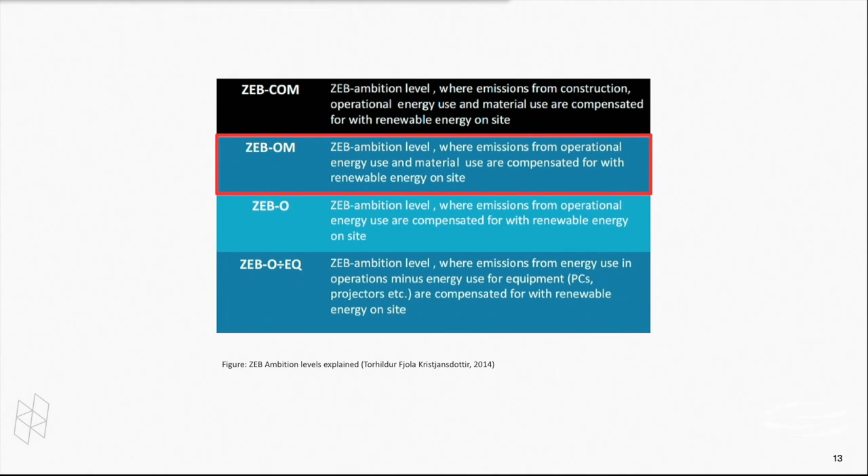This, as you read it, just as the text, doesn't seem too complicated, but as the methodology of working, it's actually a totally different world than all other projects we ever tried. The really glorious thing about this really high ambition is that it forces it into a life cycle perspective, meaning that we will need to count for both the production phase of every component and material coming into our construction site, including the transport, the construction site itself, then the full operational time of 60 years, which is the academic standard for how you count for things, called the service lifespan.

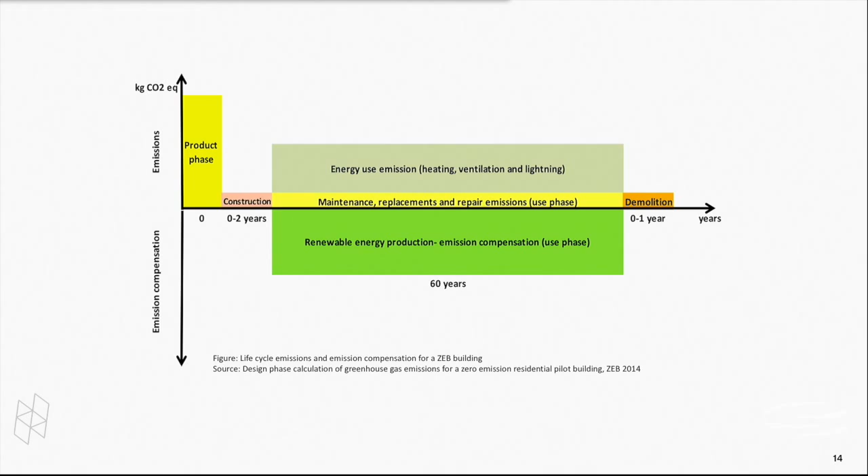So all the energy used for your operation, and also the changing of components, all of those are going to be counted for. Even the demolition, we never got that far yet, but this is still to be developed as a way of counting and working. And all of that should be paid back with renewable energy production on your roof.

So the first case, the first pilot, started with Entra as a developer, who had this complex of buildings a little south of Oslo. And they are actually quite general office buildings from the 80s. There's hundreds of these in Norway, probably around the world. We brought the energy use for those 2 blocks down from 220 kilowatt hours per square meter.

I'm sorry, I cannot really immediately explain that in feet and BTUs and all of that, so you need to come up to me later if you need a thorough explanation of the measurements. But we brought it down to 19.7 without changing too much of the architectural aesthetics.

Unfortunately, the municipality also wanted these to stay pretty much the same afterwards. They were very, very well renowned when they were there in the 80s, so they wanted them to, of course, look better, but still the same, still black, still box, still basically the same windows, nothing added on the roof. So that was the constraint that our office had to work a little with, but we got around it.

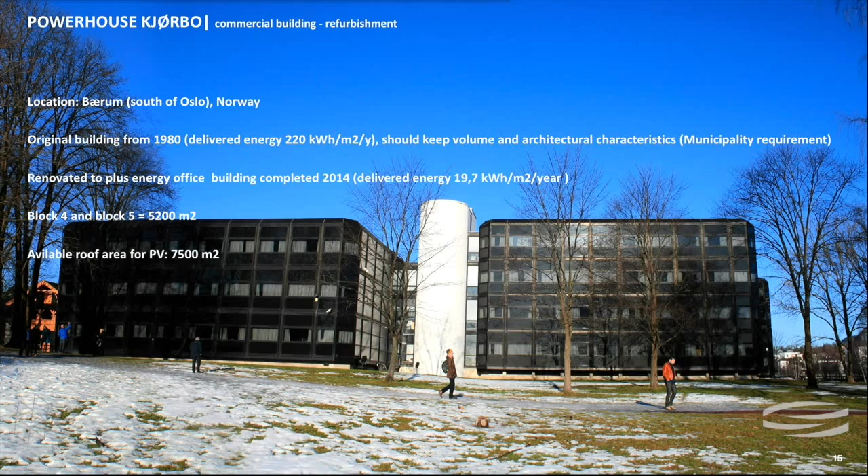And we focused on the inside. The inside of these offices were not at all to be the same as they used to be. These should come up to all standards, so daylight, acoustic strategies, indoor air quality. At the same time, provide spaces for different activities for people to feel creative, to have different work rhythms, and at the same time have a low embodied emission for all materials and a super low energy use.

And I'm now going to just show you a few examples or explain a few stories of how this group work turned into a circle. This is just an example of a circle. The team, of course, then were added a lot of people that we normally don't see around the table before, maybe quite close to the end of the project. We started sketching. People started measuring heat loss. We call them windows, they call them heat loss. How to measure those together.

We found that most of the materials we preferred to use had really high emissions. We didn't really know what they contained. People from the ZEB Center came in with documentation, told us that we need to do some changes. Because all the time we need to measure back to how much roof area do we have to pay these things back. So the whole ZEB balance thing was measured out in workshops.

We went back home, did our work as architects. They did their work as material consultants or energy consultants. We came back, compromised, and went back home again. We did that for 4 rounds.

So the whole thing then goes in loop. So the easiest things first, energy supply. We went into the ground, got energy from the ground source heat pump. No actual budget for making a new technical space because we couldn't really afford more concrete. So a technical space ended up in the top floor, and of course that's a really expensive area, so they needed to be very compact. So new solutions for technical spaces.

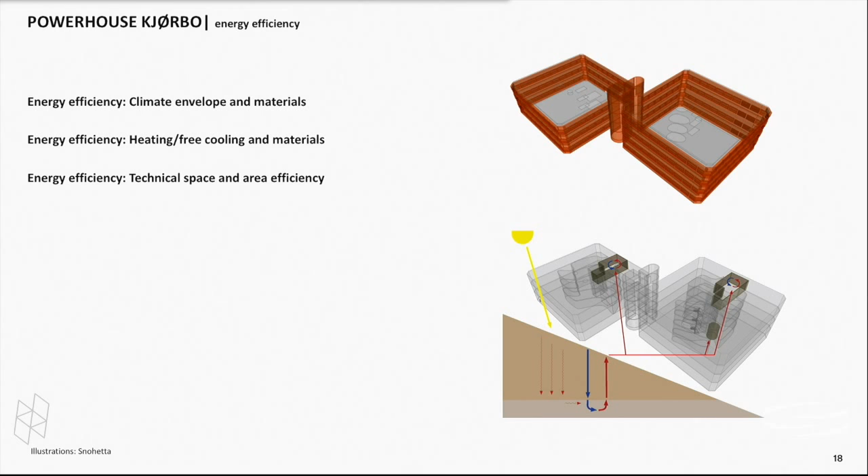Climate envelope, usually quite easy, but it's hard to make passive house standard and also provide enough daylight. Also, it's important to note that all the insulation has a really heavy number of embodied energy, so you need to also carefully measure that your R values and U values are measured at the same time as you measure your daylight and your embodied emission.

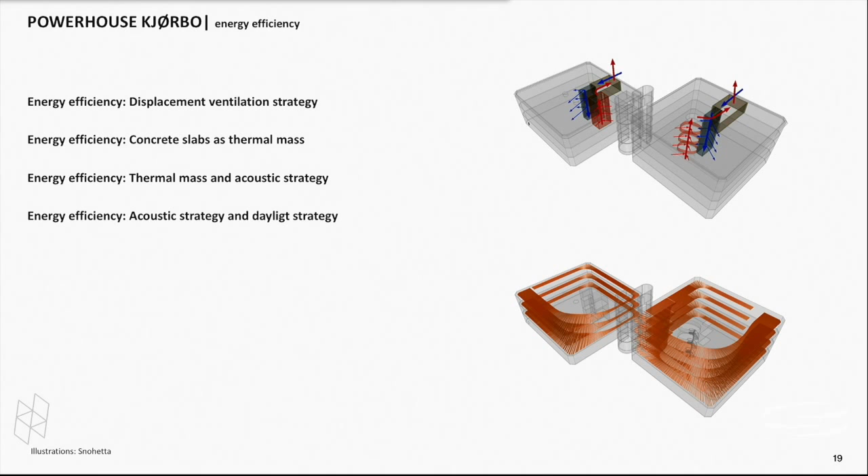Ventilation strategies with displacement air coming out. Really slow-moving air needs big spaces, needs thermal mass. Thermal mass means concrete. Concrete means really crap acoustics. Acousticians want suspended ceilings. That really collides with the ventilation energy strategy. Need to work around that. Means that we need to separate the different programs so they don't conflict in the way of noise production. We need to use all surfaces to actually do acoustic absorption.

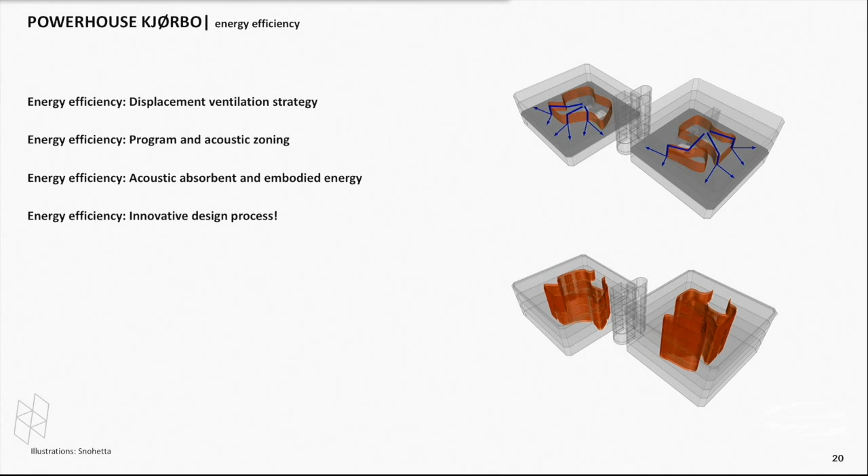Need to make sure that what we make all these acoustic elements out of is actually recycled from plastic bottles in the end, because all the materials we came up with that had some sort of product standard of acoustic effect were full of all sorts of things that made emissions into the room, that made the fans go, that made the kilowatt hours drive. So we couldn't use anything in the end that really came off the shelf. So the new products are actually these elements that are covering both the ceiling and the walls and still providing 40% of concrete to be exposed to keep the air quality perfect.

So this is actually an internal stair seen from the architect's point of view. It's the air extract shaft seen from the ventilation strategy point of view. And it's the place where people actually move around and feel that this house is for all of them, where they can meet, seen from the user's point of view. We actually got this one registered as an innovation, a staircase.

Another part of the story is when you need to keep your emissions down, you need to start reusing things. These really ugly facades from the 80s, sort of half blackish character, were suddenly valuable energy sitting there. We made the contractor understand that it was actually just as easy to set up his own line and produce these doors for meeting rooms based on these elements rather than buying them off the market. It actually turned out both to be cost efficient and of course you could set the embodied energy to 0.

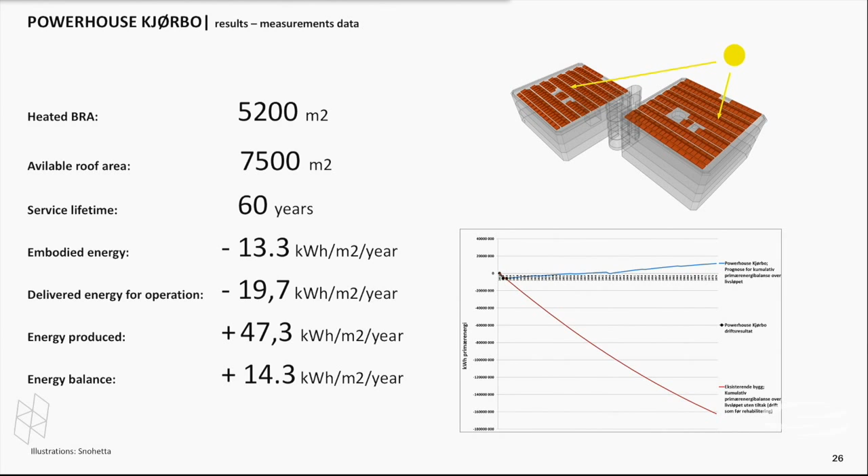Summary is the embodied energy from materials and construction and transport measured down to 13.3 kilowatt hours, and delivered energy for operation is 19.7. And the important message is that for a new building, this is actually then a higher number for embodied energy due to the fact that concrete and steel was not even counted for since this is a retrofit. So it's a pretty scary number.

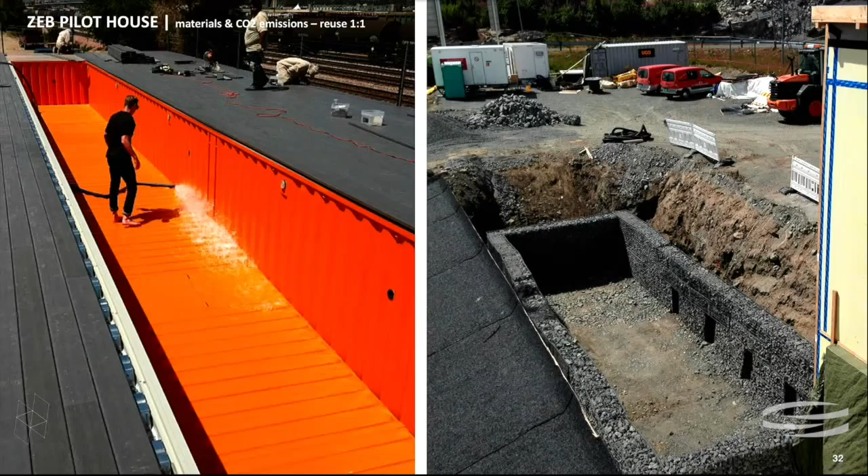Ventilation for a bedroom, you can actually take out if you have the right materials in the room, the right air volume, and actually quite a cool space. Even the swimming pool is actually reused out of an old container with natural stone as the foundation. And also, I think it's an important message when you do these measurements all the way down to life cycle and changing of components, and you do have help from people who really know about different EPDs and products, you can see you need to compare your PV systems and be critical about all the technology that you add in.

Just an example showing that for different kinds of solar PV products, you can see the emission numbers in the mid column are radically different, whether they're produced on renewable energy or produced on coal in China. You also need to look at how many times you need to change your components within the life cycle. So it's not a big sort of hallelujah for all the technology. You need to be critical of all your components and also the technology. You need to look at how many times do I need to change that component before I can really know how efficient it really is.

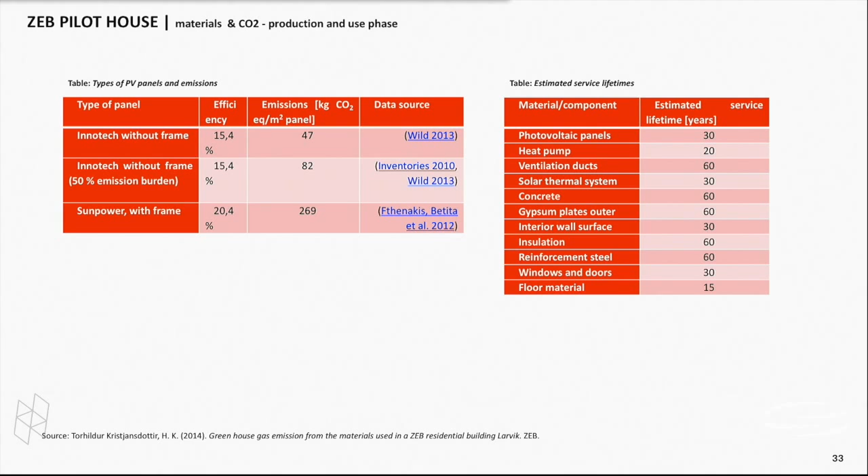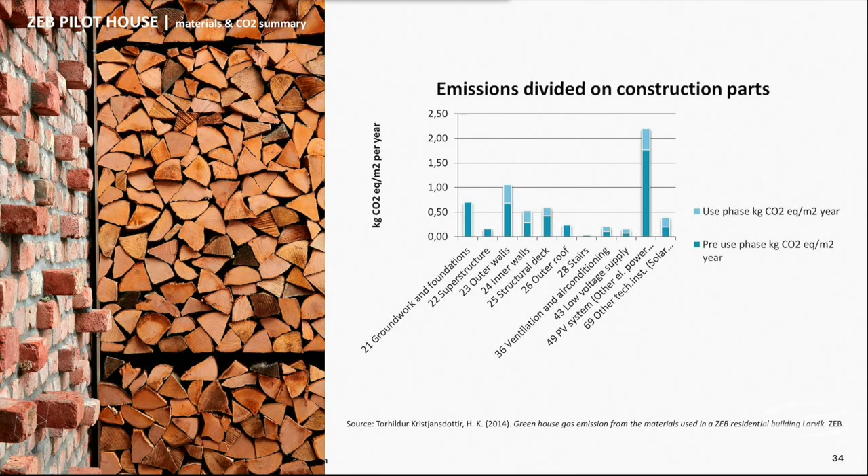So as you can see, when you sum up all the emissions from this residential home, if you really want to pay back every single kilowatt hour in such a small house, you end up with 202 square meters of housing and 120 square meters of PV. It's more a state-of-the-art example of how you can actually go all the way to a plus energy house, but look at the column for the PV system, it's quite high. We also needed to work a lot with foundations to get out of concrete to be able to do this at all. So basic numbers are 202 square meters of housing.

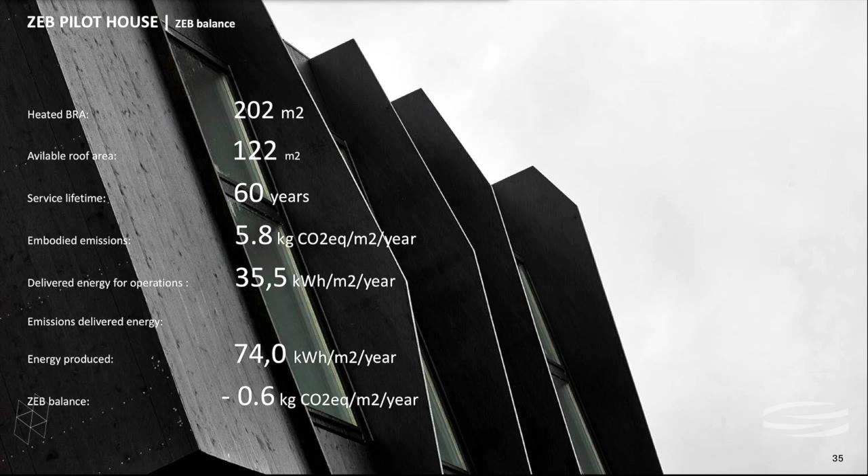The target was that it's got to be less than 6 kilos of CO2 per square meter over the life cycle, which is quite ambitious, but still we think we should go down to half of that next time. We did achieve the indoor-outdoor connection. I think that's probably been the biggest success of this house, that it's got these different rooms and different connections, different materials that are more familiar to people than maybe what we've seen in the passive houses that have been more focused on the thickness of the wall.